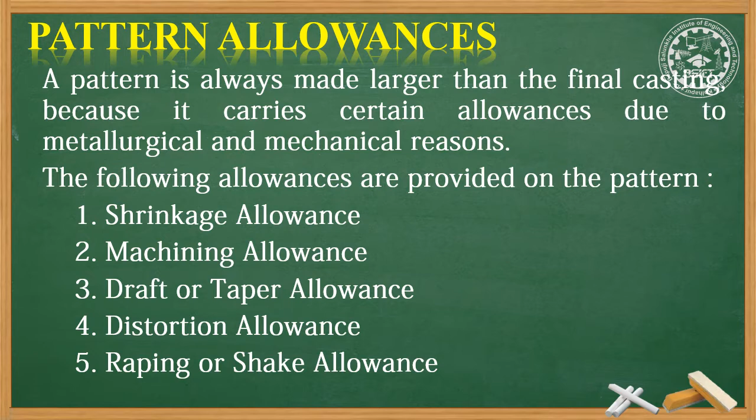The following allowances are provided on the pattern: shrinkage allowance, machining allowance, draft or taper allowance, distortion allowance, and rapping or shake allowance. So there are 5 different types of allowances that we can add on a pattern. Now let us discuss these in detail.

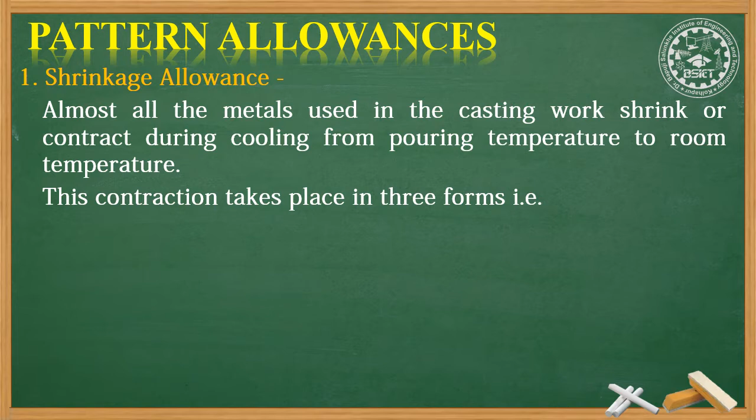To compensate liquid and solidifying contraction, gates and risers are provided in the mold, whereas for solid contraction, adequate allowance is provided on the pattern. So we see 3 types of contractions: liquid contraction, solidifying contraction, and solid contraction. For the first two, liquid and solidifying contraction, we provide gates and risers in the mold design, and to counter solid contraction, we provide adequate allowance in the pattern.

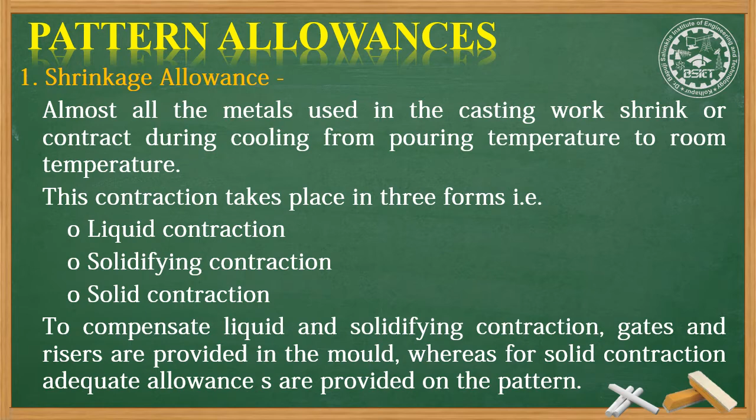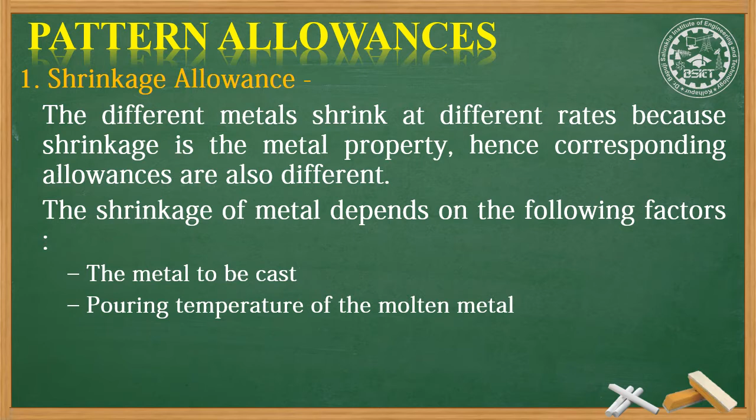The different metals shrink at different rates because shrinkage is a metal property. Hence, corresponding allowances are also different. Since the shrinkage percentage of each metal or alloy we are casting is different, naturally the shrinkage allowance we provide also changes according to that metal and alloy. The shrinkage of metal basically depends on the metal to be cast, pouring temperature of the molten metal, dimensions of the casting, and method of molding. These 4 factors determine the shrinkage of that metal.

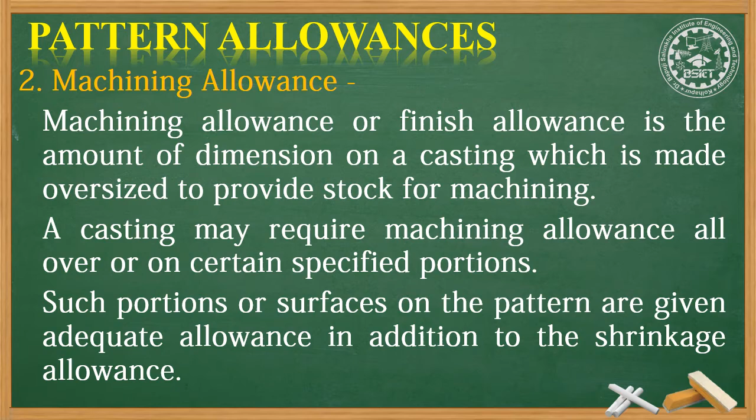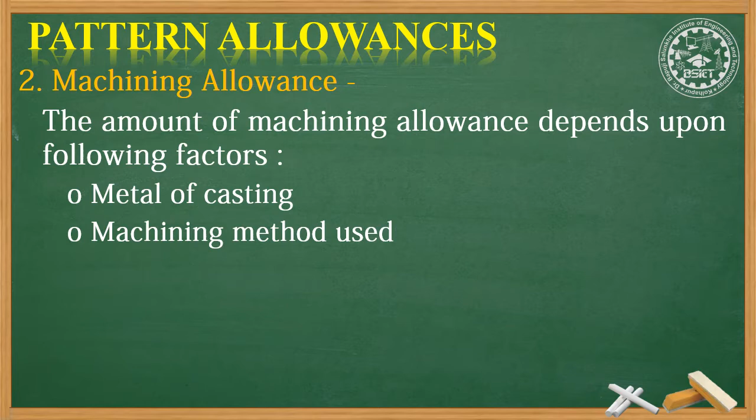The amount of machining allowance depends on metal of casting, machining method used, and casting method used. It will also depend upon the shape and size of the casting. Also, the amount of finish required on the machined portion. So these are the 5 factors on which the machining allowance depends.

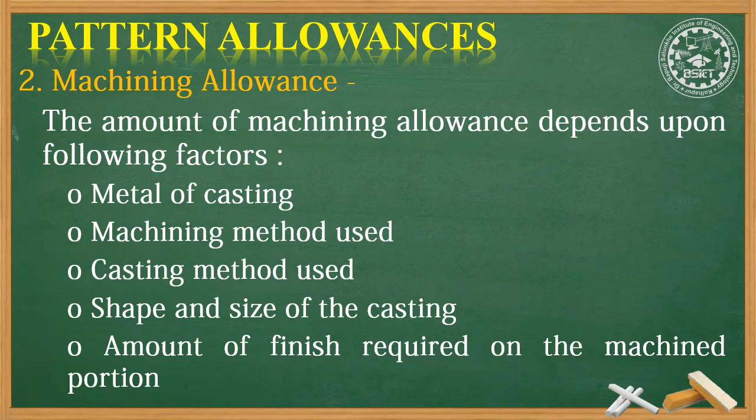The ferrous metal needs more allowance than the non-ferrous metals. In machining allowance, if we are casting ferrous metal, the machining allowance required is more rather than for non-ferrous metals. Similarly, large castings need more allowance than small castings. Machining allowance varies from 1.5 mm to 16 mm, but 3 mm allowance is more common for small and medium castings.

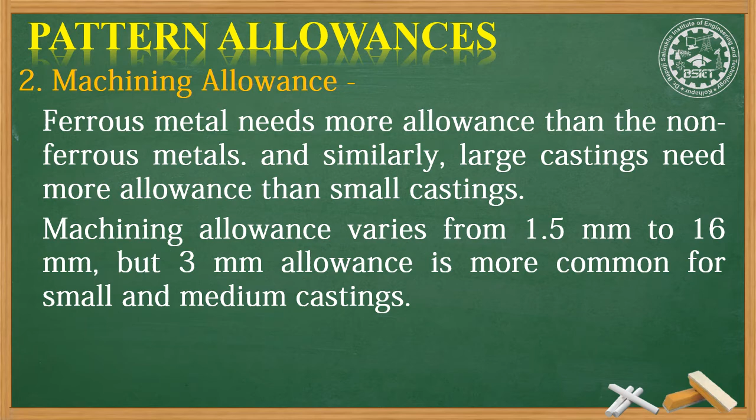The third type of allowance is draft allowance. Draft allowance, also known as taper allowance, is given to all vertical faces of a pattern for their easy removal from the sand without damaging the mold. When we pour molten metal into the mold and it cools, and then we remove the casting from the mold, this draft allowance is basically provided so that the mold doesn't break. Draft allowance is also called taper allowance. We give taper so that when we remove the casting, we can take it out easily without damaging the mold. This slight taper inward or outward on the vertical faces is known as draft.

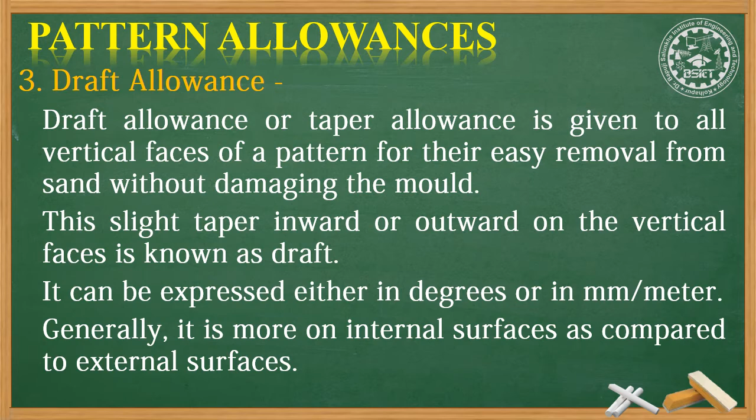Whatever taper we give, inward or outward, that is called draft. It can be expressed either in degrees or in mm per meter. Generally, it is more on internal surfaces as compared to the external surfaces. The amount of draft allowance will depend upon shape and size of the pattern, method of molding, material of molding, and this allowance varies from 10 mm to 25 mm per meter on external surface and 40 mm to 65 mm per meter on internal surfaces.

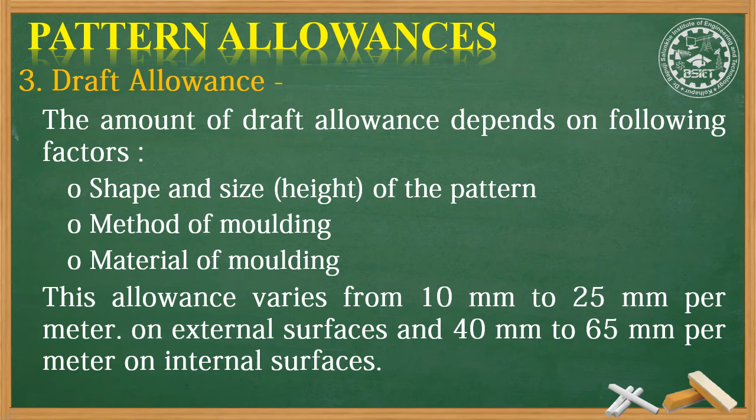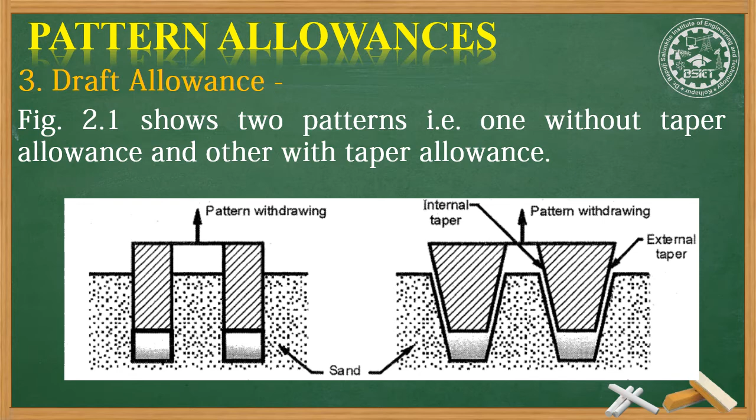The figure shows two patterns, one without taper allowance and the other with taper allowance. If we look at the first one, it is without taper allowance, meaning no taper is visible, it's just placed straight as it is. Whereas in the second figure, we can see there is an internal taper and the external taper given for easy withdrawal of the casting. So that is draft allowance.

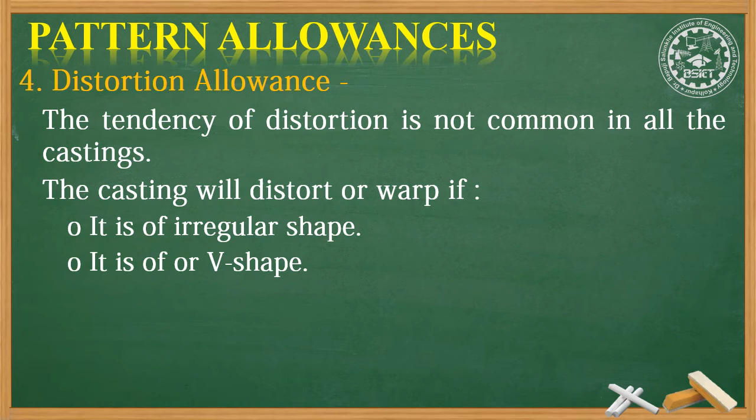The fourth type of allowance is distortion allowance. The tendency of distortion is not very common in all castings. The casting will distort or warp if it is of irregular shape, like an L or V shape, or has arms with unequal thickness.

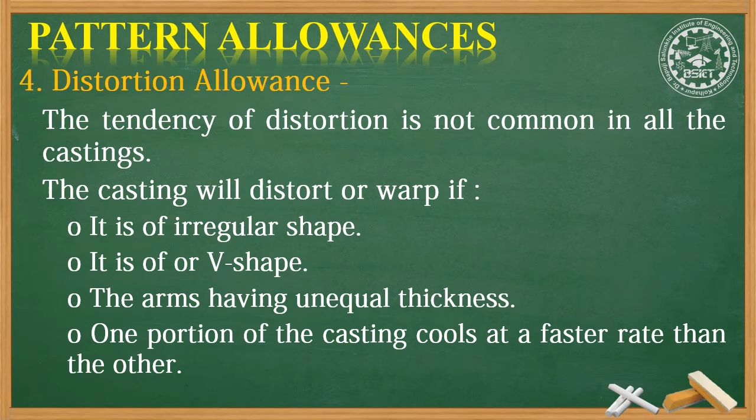Also, we can see the tendency of distortion if one portion of the casting cools at a faster rate than the other. If uneven cooling is happening, we see distortion there too, and in such cases we need to give distortion allowance.

To eliminate this defect, an opposite distortion is provided on the pattern so that the effect is balanced and correct shape of the casting is produced. We give it in the reverse manner on the pattern so that the distortion effect gets balanced and we get the casting as required.

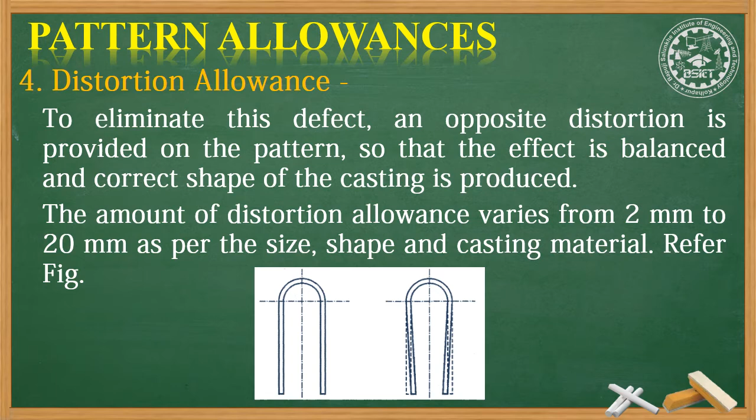The fifth type of pattern allowance is rapping or shake allowance. When a pattern is to be taken out from the mold, it is first rapped or shaken by striking it with a wooden piece from side to side.

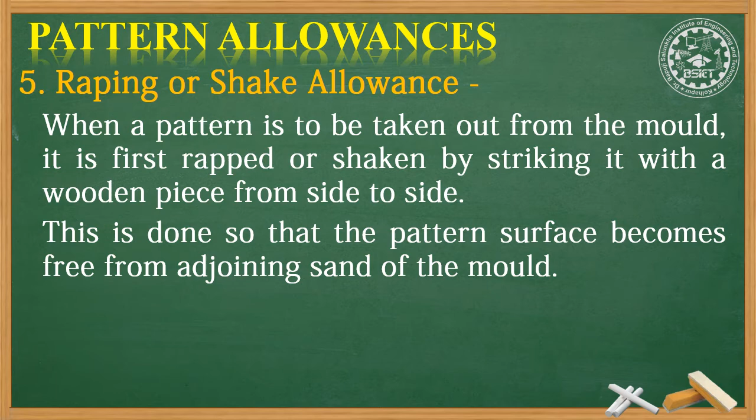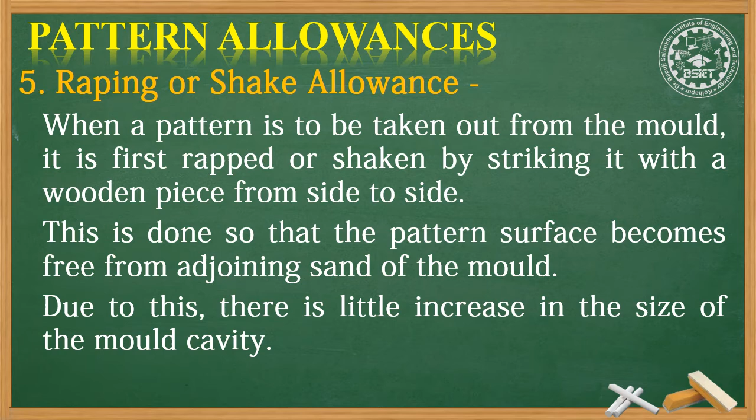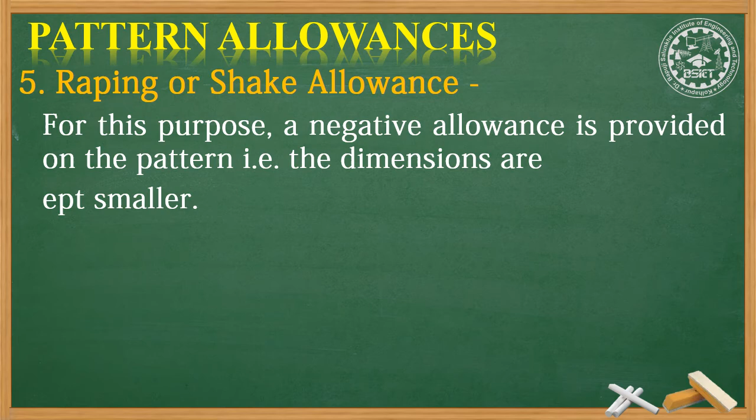For this purpose, a negative allowance is provided on the pattern, that is, the dimensions are kept smaller. It is normally provided only to large castings and is negligible for small and medium size castings.

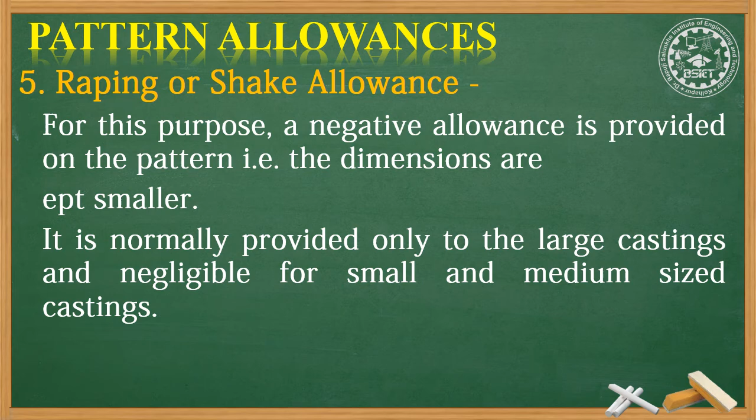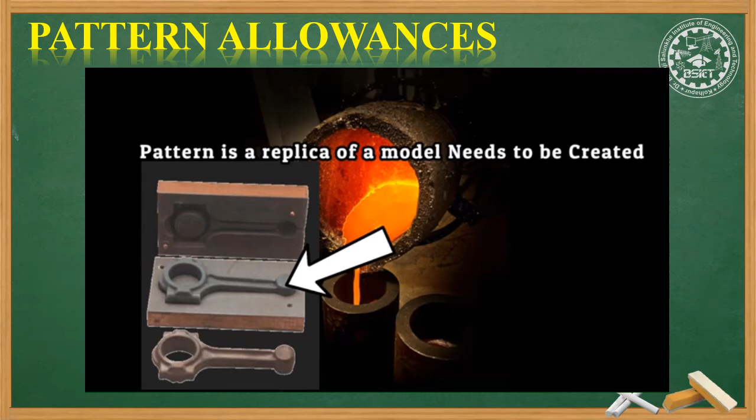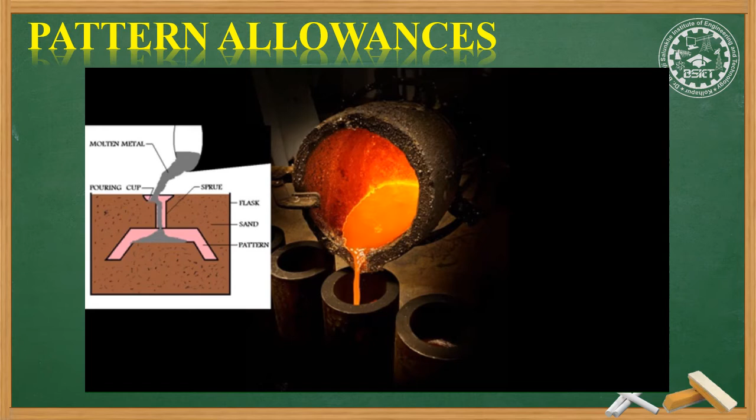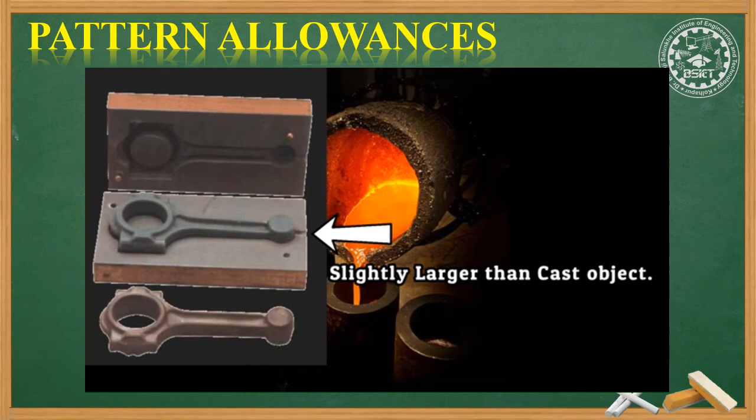The pattern is a replica of the casting, but it has slightly larger dimensions. This change in dimensions between pattern and casting is due to various allowances used in casting. When the cast solidifies, it shrinks to some extent due to the metal shrinkage property during cooling, so the pattern is made slightly larger to compensate for it. There are other reasons too, due to poor surface finish and casting limitations. Casting is made slightly larger so it can be machined or polished further. So the pattern, hence the cavity for casting, forms slightly larger, which compensates for all these drawbacks of casting. The change in dimensions of pattern and casting are known as allowance.

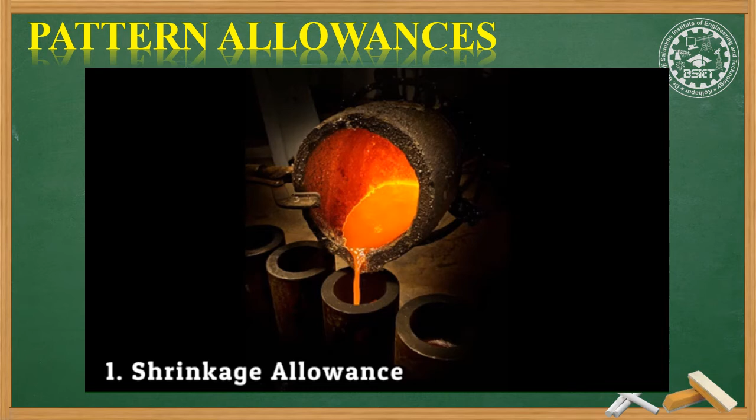The first is shrinkage allowance. Shrinkage is defined as the reduction in dimension of casting during solidification or during cooling. This is a general property of all materials. Some metals shrink more, some less, but every material shrinks.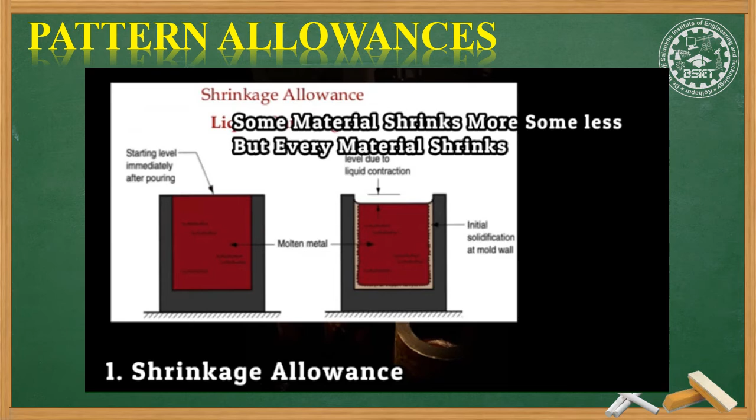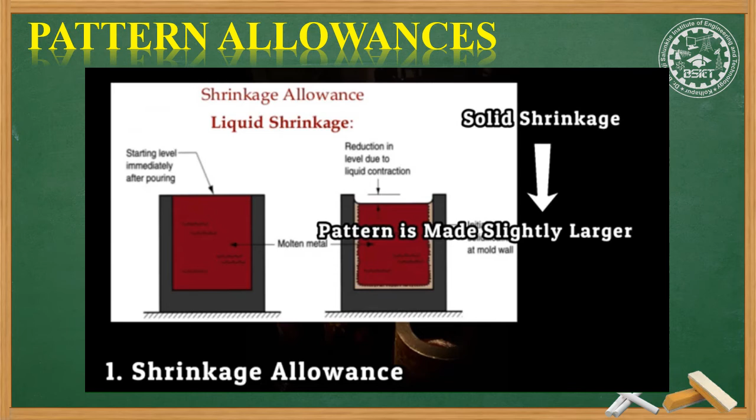There are three types of shrinkage: liquid shrinkage, solidification shrinkage, and solid shrinkage. The liquid shrinkage and solidification shrinkage are compensated by a suitable riser, but solid shrinkage is not compensated by it, so the pattern is made slightly larger to compensate for shrinkage. This is known as shrinkage allowance.

Next is the draft allowance. When the pattern is removed from the mold, the surface parallel to the direction in which the pattern is withdrawn gets damaged slightly and converts into a slightly tapered surface. To compensate for these changes, these parallel surfaces on patterns are made slightly tapered, around 1 to 2 degrees. This allows easy removal of the pattern from the mold and does not affect the actual dimension of the casting. These are known as draft allowance.

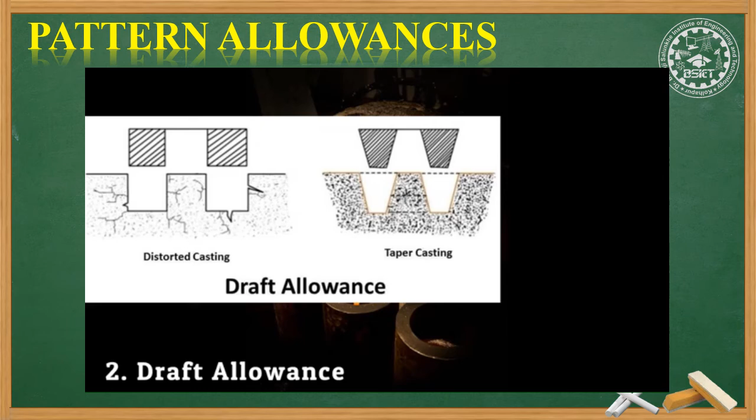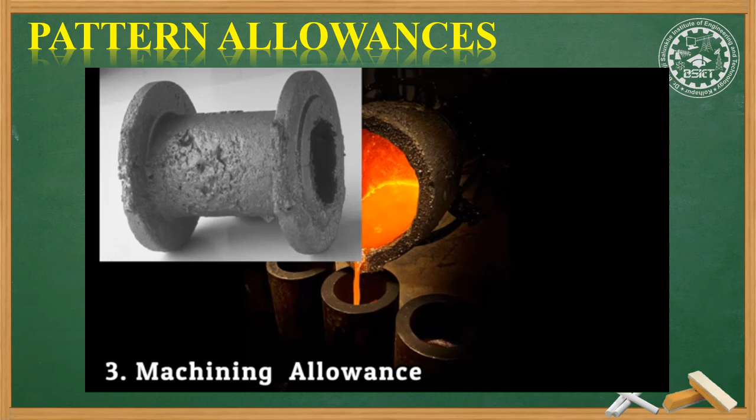As we know, casting gives poor surface finish and rough surfaces. Also, the pattern is made manually, which does not fix accurate angles and dimensions of mating parts. But we need a properly finished and dimensionally accurate casting. To avoid these problems, the casting is made slightly larger and after solidification, machining is done on it for better surface finish and accurate dimensions. This change in dimension of casting is known as machining allowance.

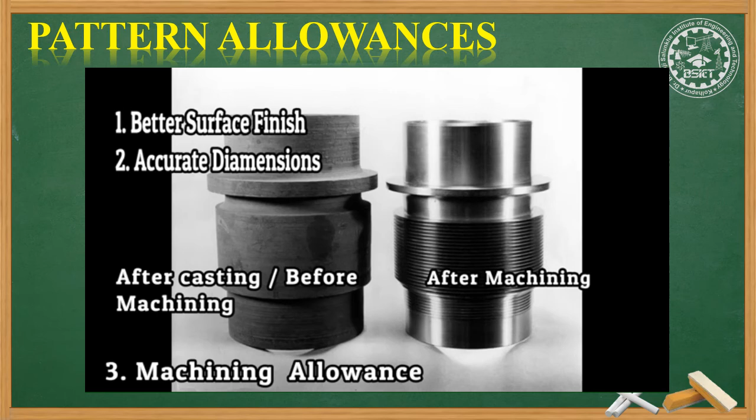When casting very thin surfaces like V-shape, U-shape etc., it will distort or get damaged during pattern removal or during casting. To avoid this problem, a camber is provided on the pattern to compensate for distortion during pattern removal. This change in casting dimension is known as distortion allowance.

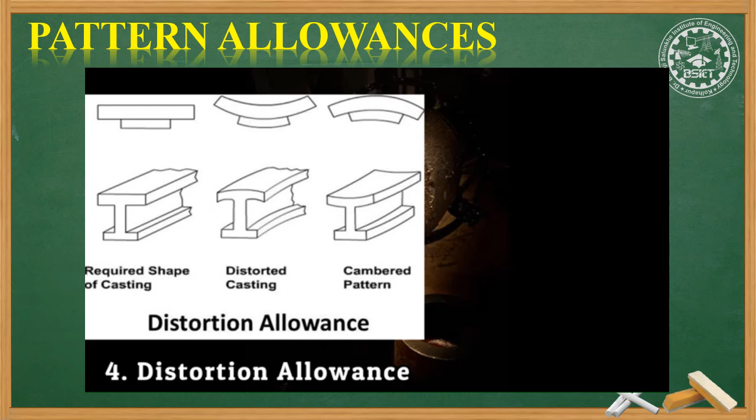When the pattern is removed from the casting, it will slightly increase the dimension of the casting. So to compensate for this change, the pattern is made slightly smaller than the casting. This change in dimension is known as rapping allowance.

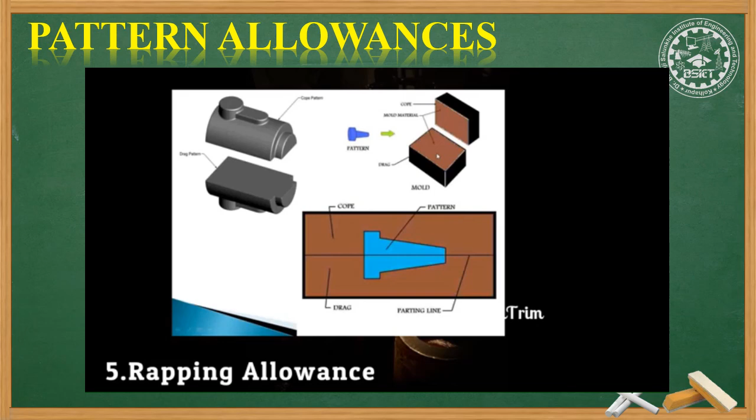So guys, these are all the main types of allowances which are considered in pattern making. I hope you liked our video.